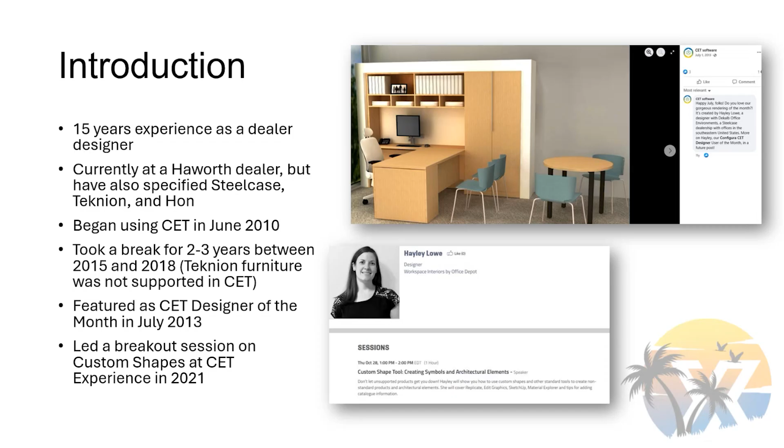All right, so you might be a CET grandma if I'm from Atlanta. Jeff Foxworthy is from Atlanta, so this makes me chuckle a little bit. You might be a redneck if guy.

So you might be a CET grandma or grandpa if you remember receiving the desk calendars in the mail, or if you remember a time before there was a CET experience. I remember the very first one. My coworker won tickets. We went to NeoCon and she entered a raffle at NeoCon and she won tickets to the very first CET experience, which was also here in Orlando.

You might be a CET grandma if you know what a key binding is. Tip: that is what they used to call keyboard shortcuts. So in my grandma brain, I still call it a key binding, and I confuse all my coworkers with that.

You might be a CET grandma or grandpa if you still use the P for your keyboard shortcut for position. I know a lot of people set this as M, but back when CET first came out, that was the automatic keyboard shortcut, it was P. So I still use P because old habits die really hard for me.

You might be a grandma if you try to use A as a keyboard shortcut in all your other programs. When I first learned that shortcut, it was for 'another.' A is for another. And here's what AI thinks I'll look like as a grandma. It's amusing to put that into my phone and see what it thinks I look like. My kids thought it was really funny when I showed them.

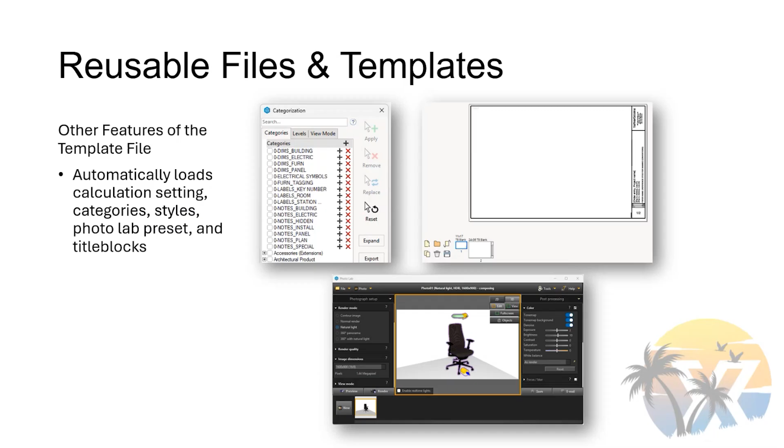Another thing you can do with a template is create a client-specific template. This is something I've only done for one client, and these are actual screenshots of what I've done for this client. When they have a busy season, they'll order 20 to 25 projects in about a 6-month period.

They cycle where they'll have 6 months where they're really busy, and then they've spent all their money and they don't order any more projects. They go into kind of like a shopping mall, strip mall type of location where they have 6 to 8 stations and a small huddle room, things like that.

Because of that, I can knock out these projects really quickly because I have all of the templates set up with all of their typicals set up in my template. In my template, I have an alternative that's pretty much blank with a title that says location name. And then I have an alternative that has basically what's on this screen, which is all of my typicals in it.

So all I have to do is they send me a test fit showing me what they want in there. I go into my alternative that has the typicals, and then I copy paste the items I need and arrange them in there.

I could get them knocked out with a drawing, a budget, because we use an Excel spreadsheet for the budgeting, and I had a template or starter file for that as well. I can knock out all that stuff in 45 minutes to an hour for each project.

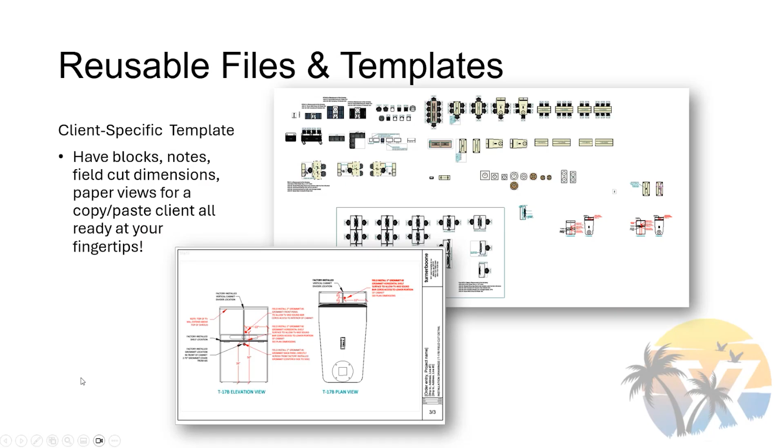Okay, so now we're going to talk about some photo lab tips. And this gets into me being a 1 on the Enneagram again. I like my photos to be lined up perfectly. I'll show you how that looks in real life here in a second.

There's a couple different ways you can do this. Say you want to do a 6-pack, because that's what my actual example here is, and you have 3 finish options you want to show the customer.

If you have that in 3 separate alternatives and in the same place, you can open up those alternatives and have the one common photo series for all drawing alternatives. You can render it, then switch to the next alternative and render it, and then switch to the next alternative and render it. And that works just fine.

But there's another way you can do it where it keeps it all in one alternative so that you can do render multiple, which saves a couple minutes. Both of them are fine ways to do it. There are certain situations where I do it the first way I talked about, with everything in a different alternative, and certain situations where I do it the second way I'm going to show you.

So what I like to do, I'll show you this in actual CET here for a second.

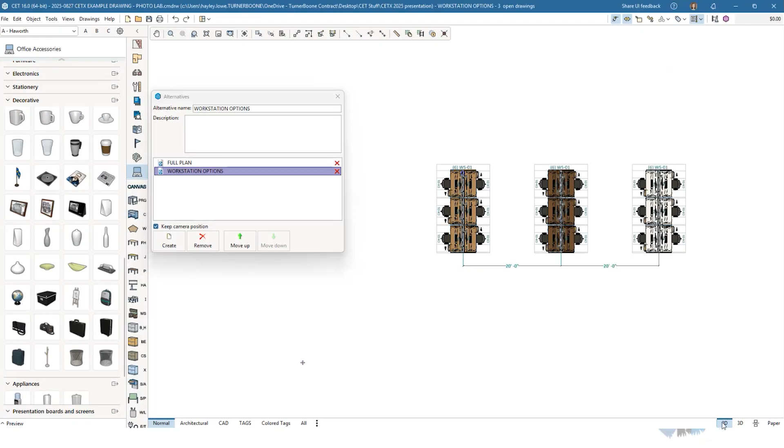So in this drawing, I have 2 alternatives. I have my full plan, and then I have my workstation options. In my workstation options, I have 3 versions of this workstation with the same exact components, just different finishes. I space them apart perfectly equally in my drawing view, so that in PhotoLab, you can take your 2D view clip box and your camera and move them by that distance. I'm going to show you in real life.

The photo lab. I do have separate unique photos for each alternative set up for this particular one, and I'm going to go back to this first rendering and just show you how I created that.

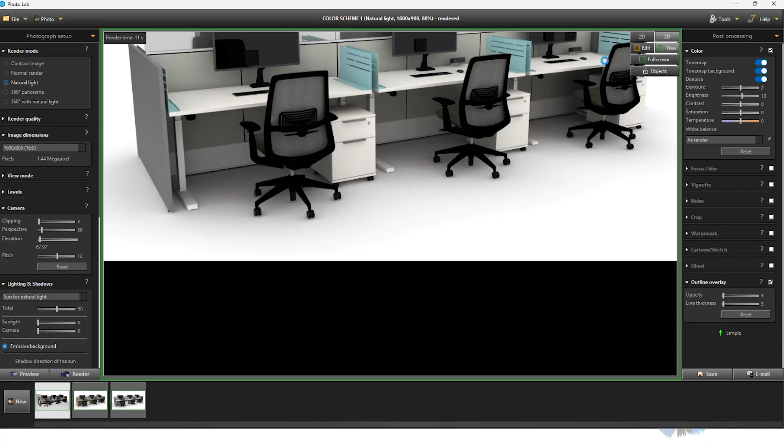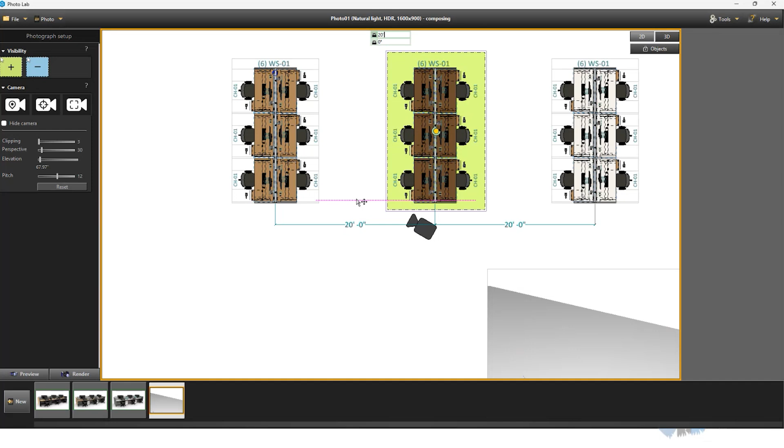So I'm going to go to 2D and click New Drawing. All I am going to do is, because I set this up... this CET is being glitchy today about selecting multiple things. Of course, on the day I'm recording, it does that. So I typically will select the 2D view clip box and the camera at the same time and move them, but I am moving this and hitting my arrow and then typing in 20 feet.

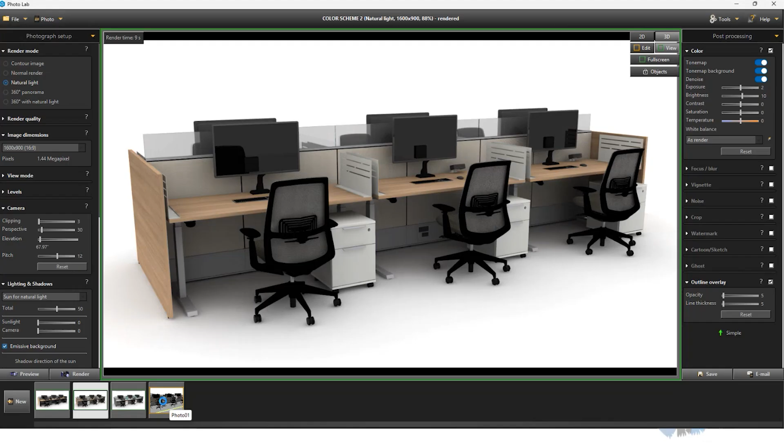And that is going to set me up with the exact same view on my rendering. So I had already done this, so I had all three. But you can see when I flip from here to here that it's the exact same view of those renderings.

So what I like about that is I could render all three of those at the same time and then save them. I almost always, when I'm rendering multiple things, will set it to render multiple and then work on typing an email, or set it to render multiple and go get my lunch. Or I have been known to set it to render multiple and then drive home while it renders on my laptop. Then I just get home, save all my renderings, and close my laptop down for the day. So just ways to save time so that you're not sitting there waiting on your renderings to be done is a favorite tip of mine.

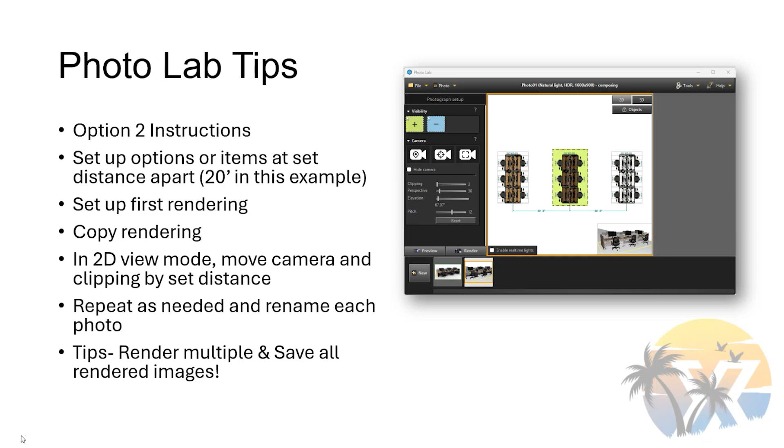So here's how these renderings look once they're done. I can kind of just go through the different finish schemes very quickly, kind of see what the differences are between them.

I like to do this too. Say I have two office options and maybe one has an overhead and one doesn't, or one has an extra lateral file and the other doesn't. I like to render them in the exact same view for that situation as well, just so that people can see, it's like in the kids' magazines that find the differences. So it's obvious what the differences are. When the angle is the exact same, to me, it helps people to see what the differences are.

All right, gonna take a sip of water. Been talking, but hopefully this is helpful information.

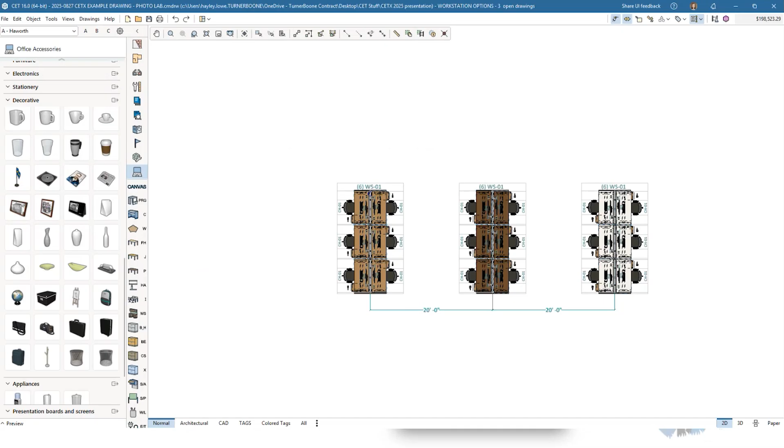Okay, this might be my top tip of the day. My favorite thing is blocks. I like to literally put every single item in a block. So I'm gonna pull up my CET again really quick and show you my block dialog in this particular drawing.

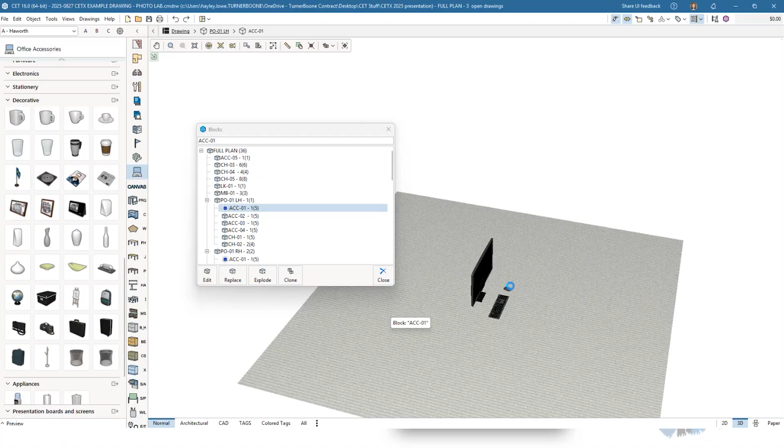Which that is keyboard shortcut B. So you can see everything is in a block, and then I have blocks within blocks. So if I click on this PO1, I have my accessory 1, 2, 3, like those are all blocks within the block. So my accessory 1 is my monitor arm, and that's the only thing in there, just the monitor arm.

So why do I do this? Because this is one of those things that does take a minute to set up beforehand. So where it pays off is when you start revising things.

So this is a screenshot of this same drawing. The other day I opened it and the power unit, the manufacturer had updated the catalog, but the symbol wasn't repopulating correctly, so I needed to replace it. Instead of having to go to 1, 2, 3 offices and 6 workstations and put it on the desk and fix it, it was in a block. So I literally had to replace it 1 time instead of 9 times. I did that in 1/9 of the time it would have taken me if I had to do it 9 times.

Another way that I like to use blocks is, say somebody has planned to use single monitor arms the whole time, and then somehow at the end of the day, their IT people say, hey, wait, we're ordering 2 monitors for everybody.

Or they say, oh, we actually have more money than we thought, where do we want to do dual monitors? I can go and switch that single monitor arm for a dual monitor arm, and it takes me 2 seconds. If I had 500 stations or 100 stations, even in cluster blocks, it would still take a lot longer than having just the monitor arm in the block. So I really recommend putting everything in a block and having blocks within blocks.

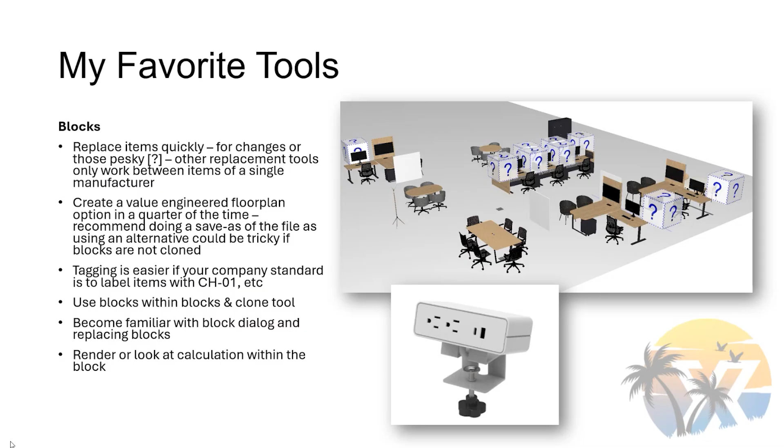Another thing with blocks, you've got to become familiar with this block dialog, where you can replace blocks, clone blocks, and do all kinds of stuff with blocks in that dialog. I like to render within my blocks sometimes, and look at the calculation within my blocks sometimes. There's actually a session spending an entire hour on blocks at this year's CET experience, so if you want to know more, I'm sure there's great information there. I would have totally chosen that topic too, but lots of people love blocks, so I definitely encourage you to check it out.

Okay, some other favorite tools that I have are replicate tools. This is something that I feel like my gap in CET kind of plays into, because these replicate tools, which they teach on in most trainings now, I think were released in the 2 or 3 years when I was not using CET and not going to those what's new in webinars.

In the tools toolbar, this circular replicate is really the only one I use because I find the other ones confusing since they're not what I learned originally. That's another thing where what works for me may not work for you. These two replicate tools might work perfectly for you. I prefer this replicate tool, which I have a keyboard shortcut for, Control R.

Because you type in more things and then hit apply, it's a little more thought out on the front end for me, instead of having everything in the green properties box like the other tool. But I love using these tools, and I use them fairly often. I like using that keyboard shortcut so I don't have to click on object and go find the replicate command, but I recommend using those to speed up your workflow.

I love keyboard shortcuts, and I have keyboard shortcuts set up for the align and distribute commands. If you wanted to align and distribute, you can go to object and align and do that.

You can also use this little pop-out toolbar, which I think you get to through tools. Let's see, I should have looked this up before. See, this isn't how I do it either. Tools, align and distribute, yep. So I'll show you that really quick right here. You go to tools and align and distribute, and it pops up this little pop-up.

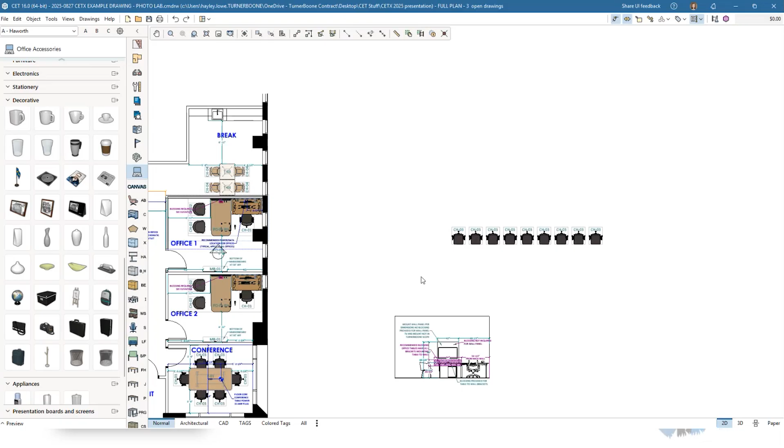But I've done this for many years using keyboard shortcuts, so I'll show you a little of what I mean. If I have a chair and a bunch of them, I have keyboard shortcuts to align them all down by hitting D, and distribute them all horizontal by hitting H. So if I didn't want to use that align and distribute toolbar, which I just pulled up with my keyboard shortcut, I could do it like this.

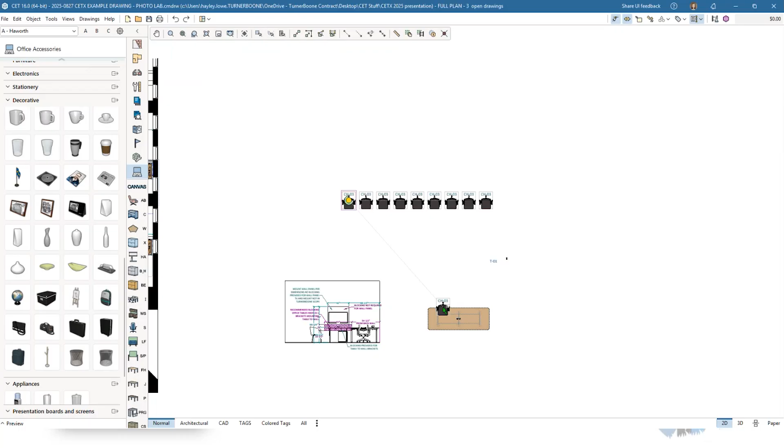This is usually how I arrange chairs around a conference table. I'm going to explode this block. Let's say I have a longer conference table here, and I need to put my chairs around it. Oops, did not delete that. So I'll come through here, put my chairs around the table, align them up, and distribute them horizontally.

Then I'll copy them using the A command, and align them using my position command. Oops, no, we're supposed to all be selected there. So I'm using position, then I hit the right arrow so it goes to the right, and I'm going to toggle it up.

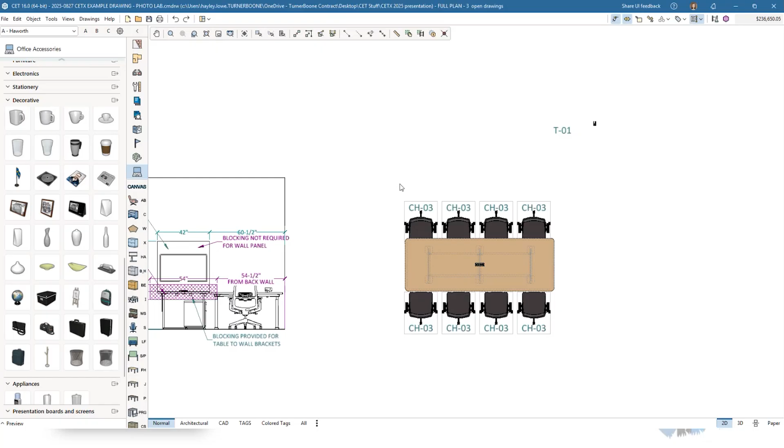Now I've got my table and my chairs, and this is where CET is being a little finicky today. So what I want to do is grab this - there we go. It's been weird about selecting things when you hit Control down today, so hopefully when I present live it won't do that. But if I hit H, it will align that table in between those two chairs, and if I hit V, it'll align them vertically so my table and chairs are perfectly aligned.

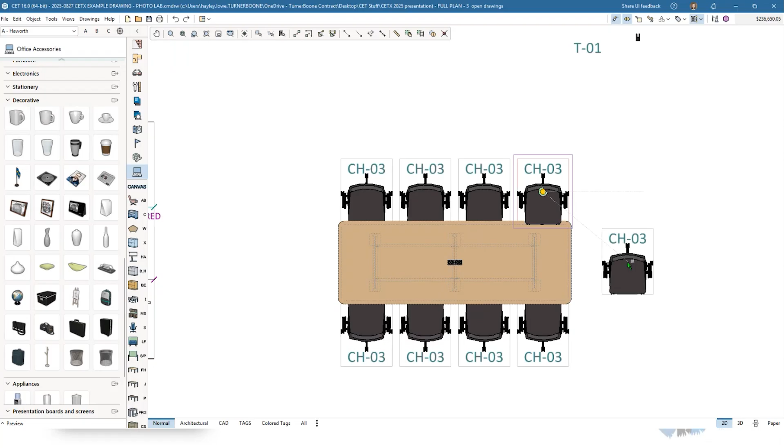This again goes into me being a 1 on the Enneagram and really liking things aligned perfectly. I'll even do that with my end chair, aligning it vertically between those two chairs. I could have also just positioned it from the middle of my block to the middle of the table - both approaches work.

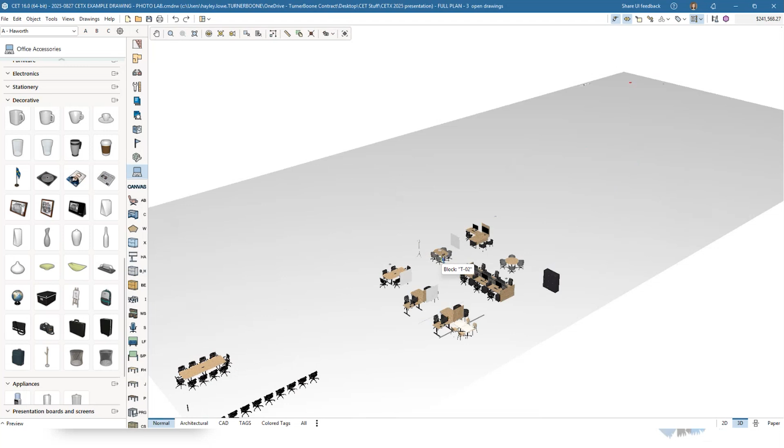If I go on somebody else's computer, like if someone asks for help or I borrow a loaner computer if mine's broken, I just go set these up, because otherwise I'll be sitting there hitting these buttons so many times a day. This is one of those things I was talking about with building habits - it depends on how many times a day you do it. I use these 3-4 times an hour, not just 3-4 times a day.

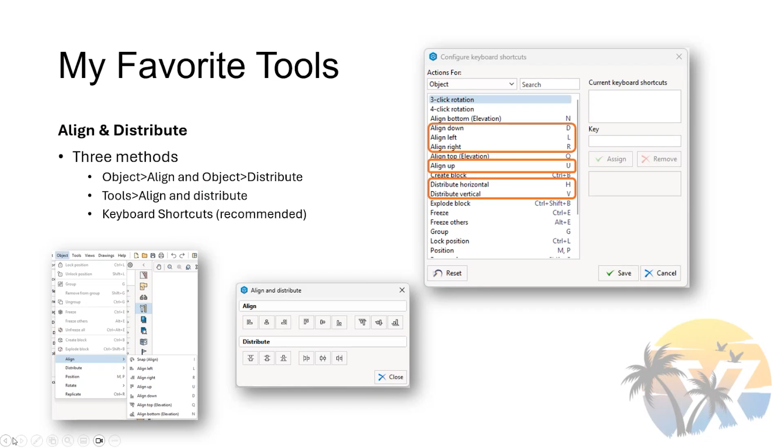This is an example of something I learned on a webinar that wasn't even part of the topic. It was a HON webinar with Harmony—I don't know if she's still at HON, since I don't use HON much anymore. I used it a lot at my previous dealer; they did monthly webinars. I learned that you can change the elevation of things using the page up and page down buttons, and get them back to zero elevation by hitting the home key.

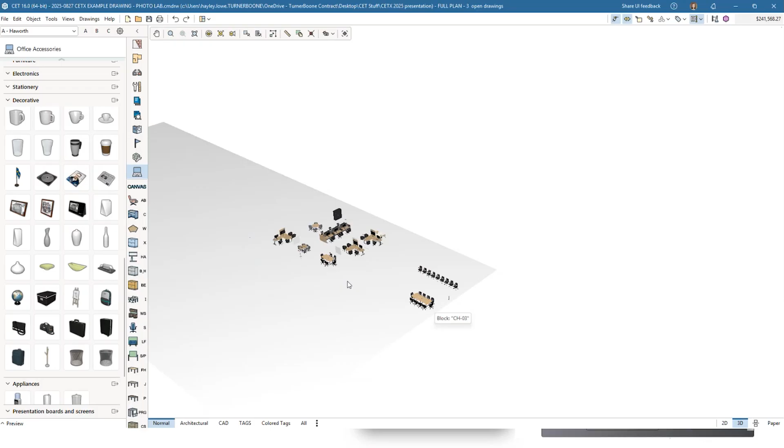I've highlighted where those keys are on your keyboard, and I put some accessories in this drawing so you can see. Say this purse was supposed to be on the floor, but when I brought in the accessory it automatically snapped to sit on top of my table. If I hit home, it'll go down to the floor. This tablet guy accessory is fine, so I don't need to adjust his elevation. But this telecom furniture piece came in at the wrong elevation.

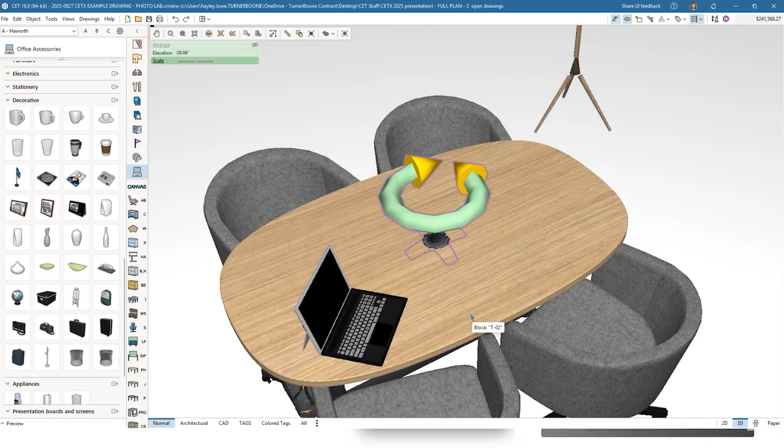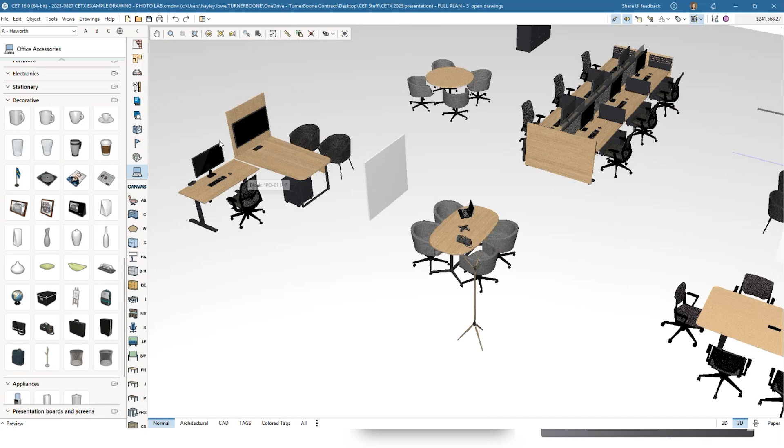If I hit page up on my keyboard, it will page that up, and control plus page up or down will move it in smaller increments. So that's page up, page down, and control makes it move in smaller bumps. If I want to get it just perfectly on top of there, I can. That's how you can easily and quickly change the elevation. I use that on the monitors a lot, and when things come in at a weird elevation, like they do sometimes, you can fix it that way.

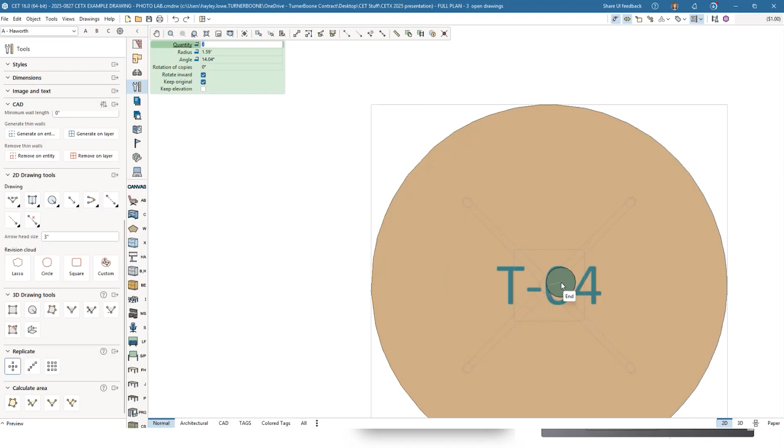I know there's another quick tip using that circular replicate tool. Let's come in here... if I have keep elevation checked on here—

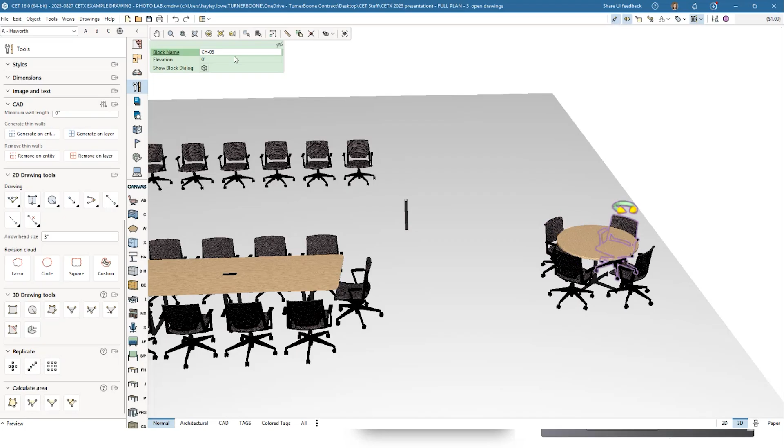it used to make things float in the air, but it's not doing that anymore. It used to be that if you used that tool, all your chairs would end up floating in the air while your table stayed where it was supposed to be, and I'd have to click on each one and hit home, home, home, home to bring them all back down. Instead of clicking on each one and changing the elevation individually, it's just one button, one keyboard shortcut, to speed that up.

There are also align top and bottom elevation options. So if you have overheads or tech boards floating on a wall that you need to align, there are tools in there for that.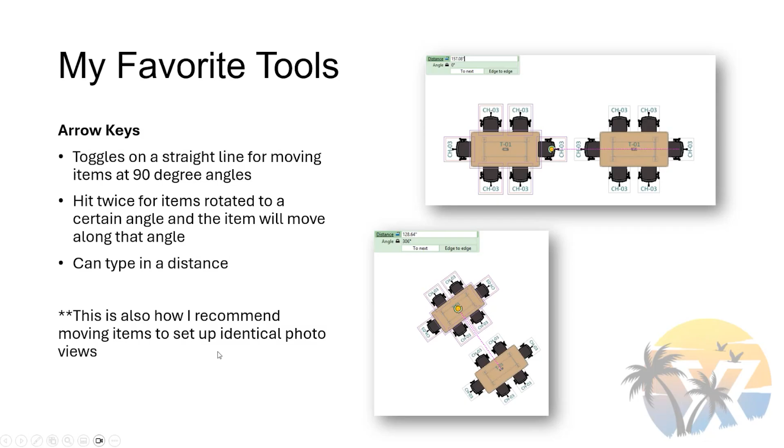If I hit the right arrow key once, it moves directly to the right. But if I hit the right arrow key twice, it picks up on that angle—these things are already rotated too. I used that when I set up those identical photo views of the workstations we looked at earlier.

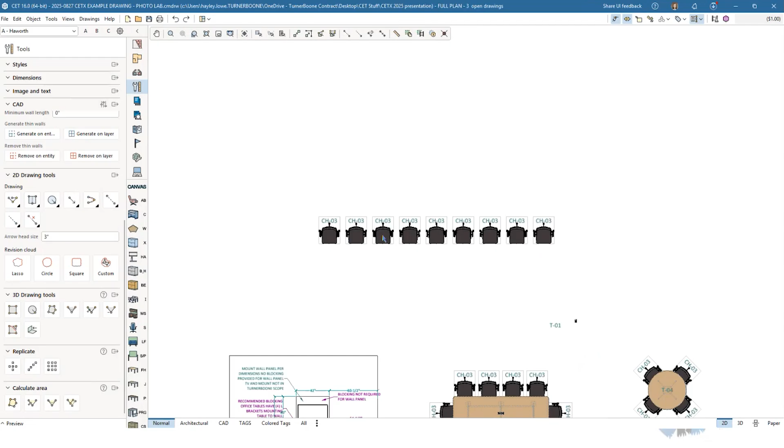Help lines—I use help lines all the time. You saw that a minute ago when I was putting the chairs around the table. I love help lines and made myself a keyboard shortcut for them. The shortcut is J, which may not make sense, but it's close to L and close to H, so those relate to help line. I already used H for distribute horizontal, so let me show you what my H does again.

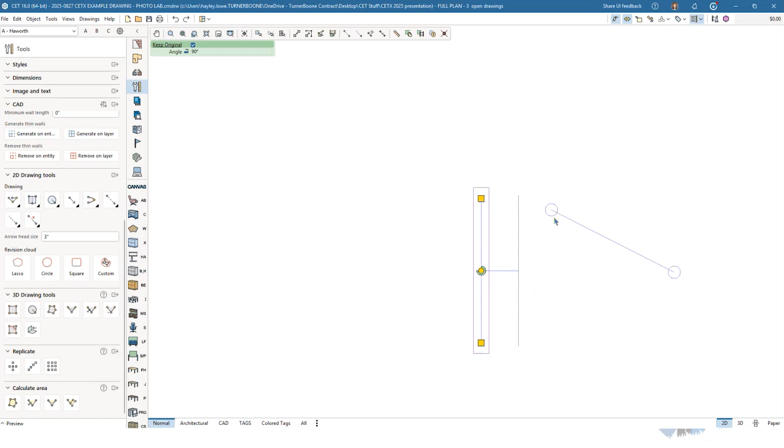My H will make those evenly spaced out, so I couldn't use H for help line—I use J instead. I'll show you quickly how I drew that help line. I just took that line and did Shift M, which is the keyboard shortcut I set up for mirror, and then copied it.

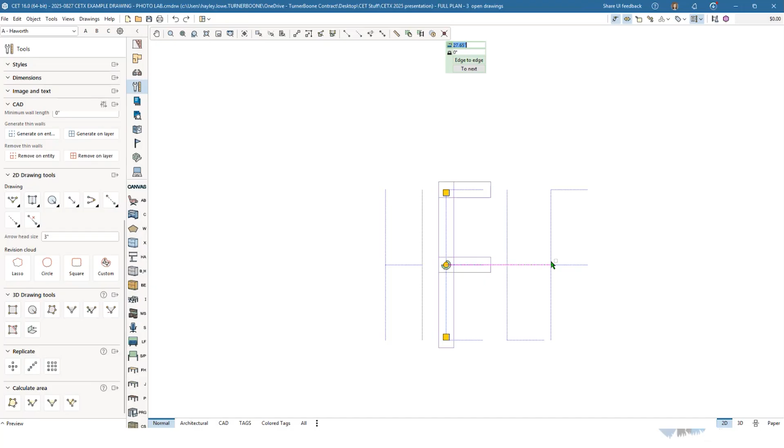And I copied these lines, using my D to align down and my U to line up. Then I copied the lines I needed for the L, and copied the lines I needed for the P. Used my J again, and there I have my help written using help lines and my other tricks. So the more you use a tool, the more you're going to find other ways to use it and things to help you.

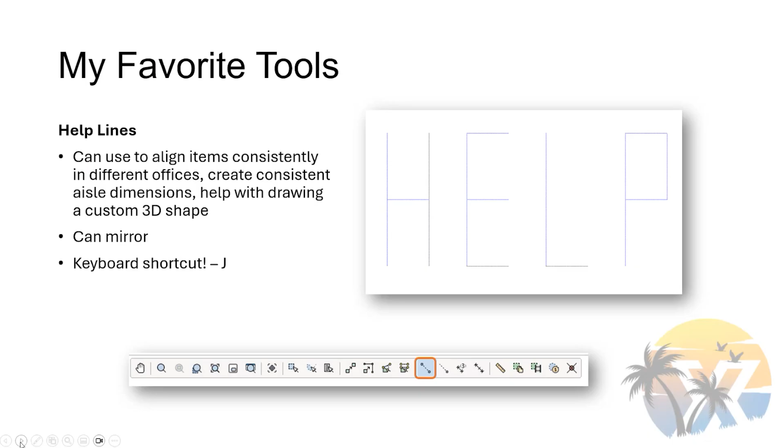So help lines and mirroring, I really love to help things be lined up perfectly because I like things to be lined up perfectly. And it keeps me able to line things up perfectly without spending too much time on it.

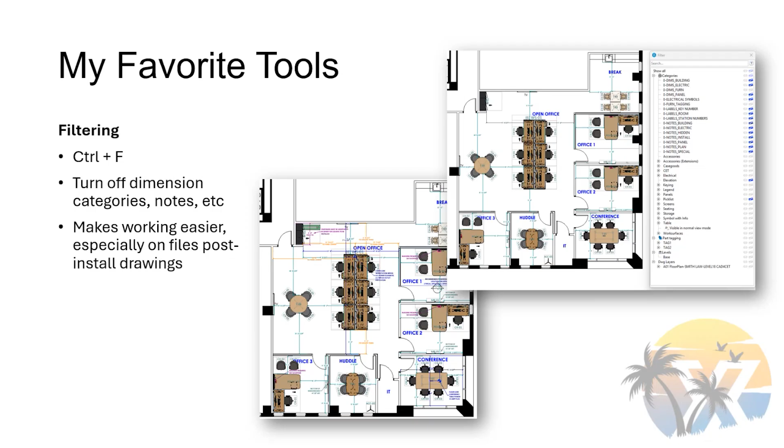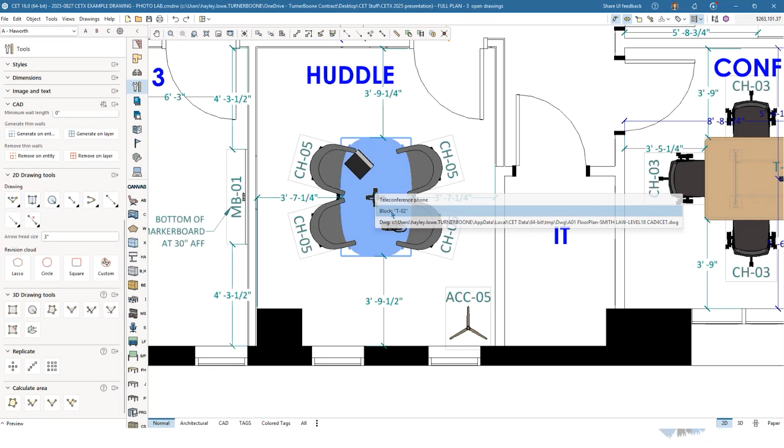This is another thing I think I learned on a HON webinar back in the day. But if you are trying to select something and having a hard time getting it to select properly, if you hit Control and right click, it will bring up a dialog box. So I'll show you right here — it says, do you want to pick up the phone, the block, or the DWG file. If I go a little bit to the side, actually if you zoom out more, it'll be close to more things, so I'm like, okay, yes, I want to edit this block.

So if you are trying to select a dimension and for the life of you it will not select — I feel like that's what I get into a lot, trying to grab a dimension so I can adjust it, and for the life of me sometimes it's like, why won't you select my dimension? Or I'm trying to select the table and it just wants to select the chair every time. Hitting that Control and right click will help you select, then you can pick what you want to select from that drop-down menu.

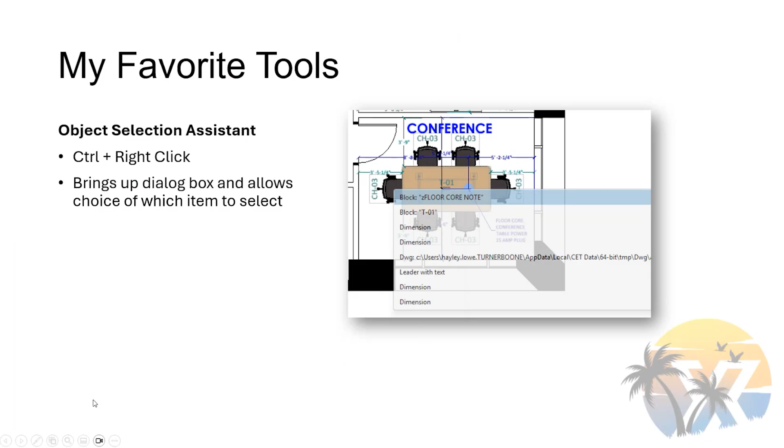Hiding things in print. This is another thing I kind of stumbled on accidentally — I don't remember ever learning it in a training — but if you have things you never want to show in print, you can right click them and hide them in print. This doesn't work for things like a chair per se, and usually doesn't work for smart symbols. It usually only works for things like text, things like pick lists. I pretty much never want my customer to see a pick list, that's confusing to them in my opinion, so I almost always right click and hide it in print.

I was working on one of those projects earlier today where I had a full drawing for the main option and then a full drawing for a VE option. On the VE option, I put in big red text across it saying this is the VE option, and then I hid it. That way, when I was flipping back and forth between the drawings, I didn't have to look at the top toolbar to say, okay, am I editing the right drawing? This is an edit I need to make in this drawing, not the other one.

Another thing I'll do, bringing my CET back up here again — I have those accessories in that conference room now, and those are things I never want to show up in print, since this is like my electrical drawing. I don't need those in my electrical drawing. But in order to go back and turn off accessories, I'd have to go into every single paper view I already have set up and turn those off. But if I grab those, right click and hide them in print, then I can go back and it's hidden in this print view, hidden in that print view.

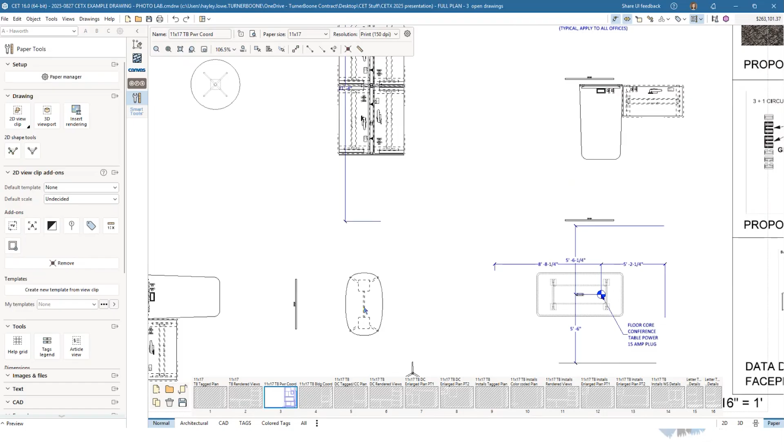But every single view, those items are now hidden. I might have accidentally grabbed my AutoCAD plan.

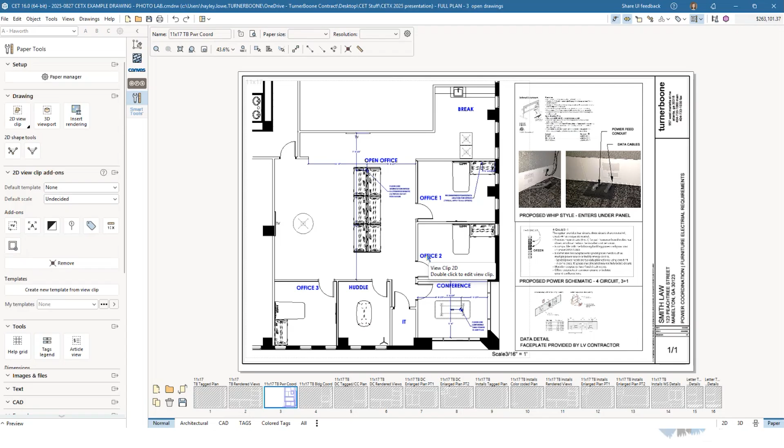Right click, show in print. I did not do that on purpose, but that's the other thing I was actually going to say, even though I did not do that on purpose, is if for the life of you, you cannot figure out why something will not show up in your paper view, go and check and make sure you didn't accidentally click hide in print on that thing. I've had that happen before. I've had coworkers come to me and be like, I cannot get this thing to show up in print. I've done everything. And this was what was behind that issue.

All right, I am running out of time, so I'm going to try to go through this quickly. But there are still things that seed drawings are useful for in CET, even now that we have template files.

So I have two that I'm going to share. I'm sure there are other things that I can't think of right now, but I use this stop motion video seed file. This is one of those things I do 3 or 4 times a year. It's not something I do on every project, but now that I have it set up, it just takes me a couple, maybe half an hour to an hour to do this anytime I need to.

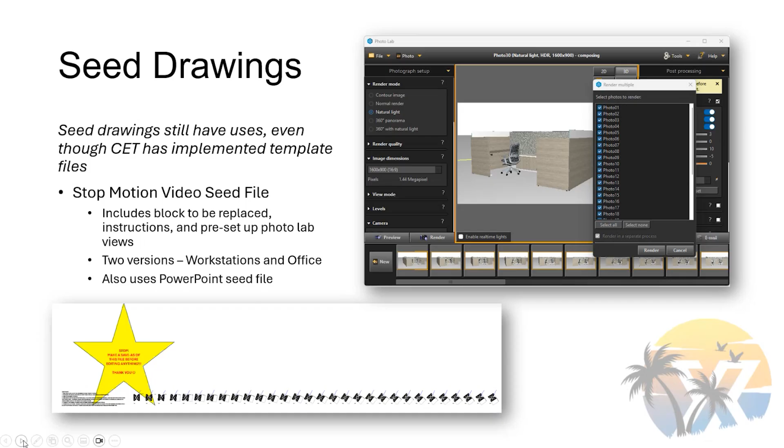So basically what this does is it is a seed file where I have the same cluster of workstations in a block, and then I rotated the block, I think 2 degrees every time, and then moved it 20 or 25 feet every time. And then I set up all my photo views so that the camera angle is exactly the same, and moved that camera angle 20 feet, 25 feet, whatever it was, so that I can then go in and render multiple. And basically then I have a PowerPoint file that you can export as a video, and it will rotate your drawing around.

So this is a fake client. I'm sure there's somebody called Smith Law, but I didn't actually do any furniture for them. But this is what it looks like when you do it.

So CET took away the movie studio functionality because everybody was just going to Twinmotion or sending it to a contractor. It wasn't very popular, but we still had the need to kind of make this sort of thing quickly. So I kind of got inspiration from a design pop video and learned how to do this.

The next thing I think this is going to show you, I hope I kept this in my example. I also will do 2 renderings and have them fade out. So those other ones are 20 to 30 renderings to create the moving thing, but you only need two renderings to create it fading from one finished scheme to another scheme. You only need a rendering of one scheme and a rendering of the other scheme, and you just change the transparency in PowerPoint before you export it.

So that's something that I use a seed file for. And feel free to go back and watch this video again since this is a recording.

Okay, then the other thing I use a seed drawing for is I have an item image seed drawing. So we do basically a rendering of each chair by itself to go on our spec pages that we show the customer. And we put that into a budget format for the customer because customers are visual. They don't understand what that chair looks like unless you show them a picture of it. And they don't remember the name of the chair from their showroom visit. They need to see the picture. And then they say, yeah, that's the chair I wanted.

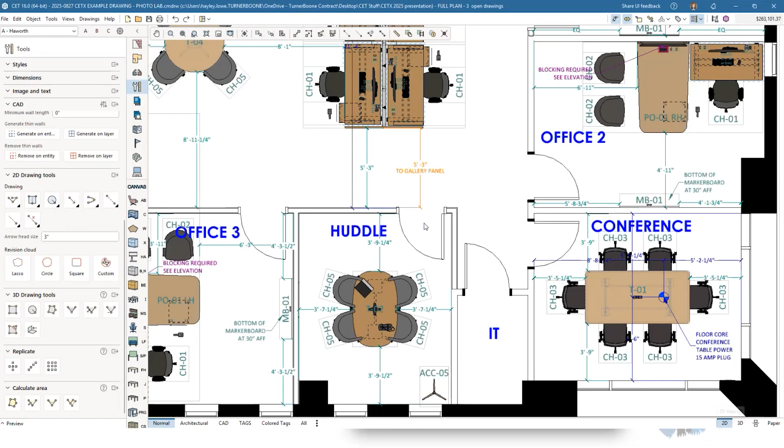So I'm going to show you really quick how I would actually use that. So if I needed to make item images of all of these things, sometimes what I like to do is I will go into the actual block and render it in the block. So that's what I did in this. This is a pretend project I did for our design standards. So I will go in the block and render it in the block.

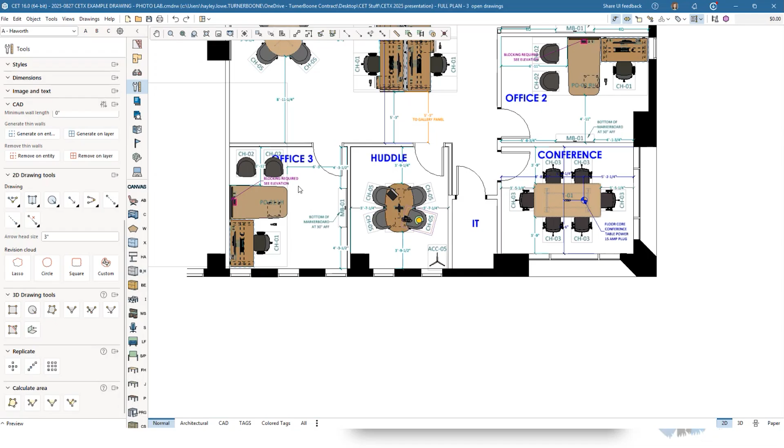That means I have to go in the block, change the floor color, open up PhotoLab, set up my photo every single time. So if I want to set it up in this seed file, I can go to this item image template, and I just brought in all of my furniture, and I have chair blocks set up in here. So I can go to B in my block dialog, and I can say, okay, chair 1.

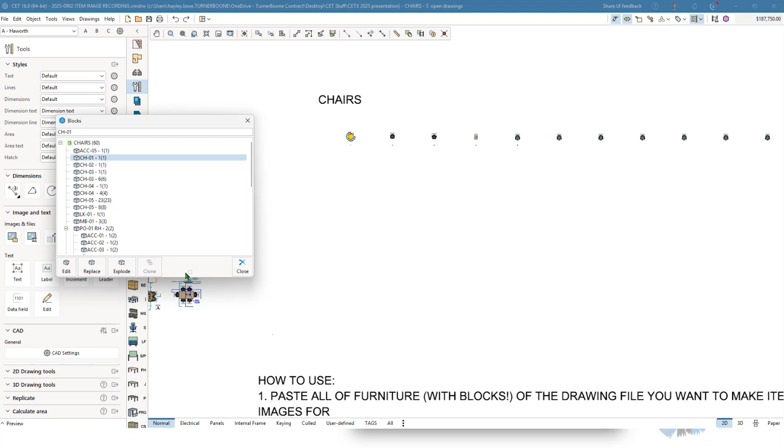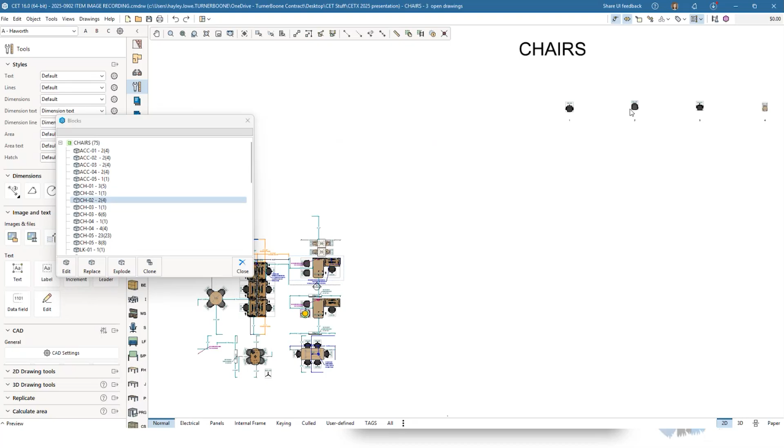I'm going to replace this block, chair 1. My chair 2 from this drawing is this chair. I can replace that one, chair 2. I can replace chair 3. I had already set this up, but you get the picture.

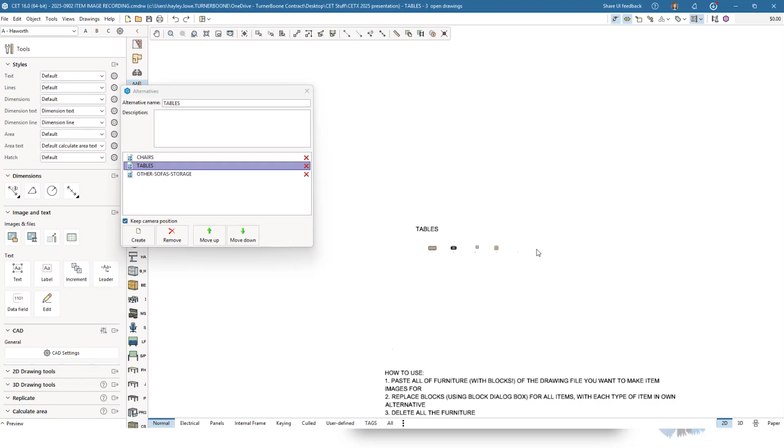So I just replace all my blocks here, and I have 25 of them set up. I probably won't use them. And then I have an alternative set up for my tables, so then I can go replace these tables. And then I have one set up for storage and other things, so that when I need to do my renderings, I already have those all set up. They're named CH-01, CH-02, CH-03.

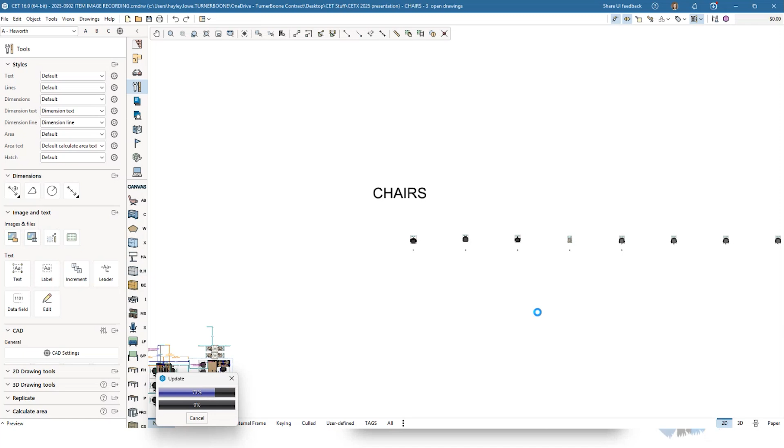I might have to tweak them a little bit, but I don't have to go and set every single one up. Now this is taking a second for PhotoLab to open because I have 25 renderings set up in there. Instead of going into each block and hitting render, I can do my render multiple, go to my tools, render multiple, and just select the 5 I need to do. I also have my post-processing settings already set up on all of these renderings, so if I'm in a hurry, on some projects this is a time saver, and on some it's not. And I will use that.

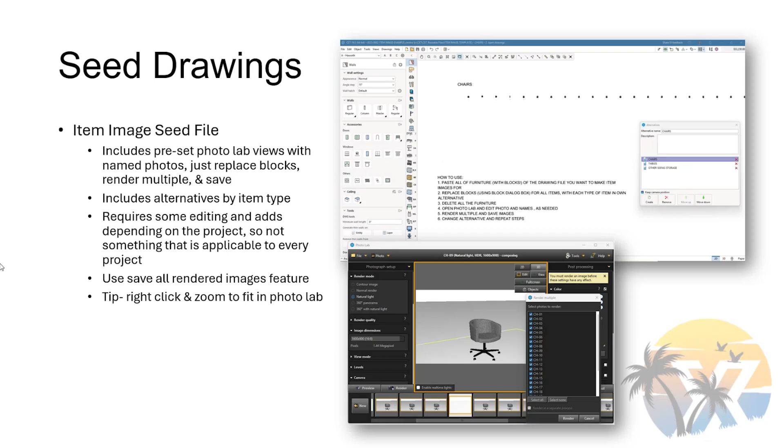So what are some things you can do to implement some of these things? Write down 1 to 3 things that you want to continue, cut, and cultivate. This is not my idea - I got this from a consultant firm that's been doing some leadership type lunch and learns with my company. Continue is something that's working really well for you that you want to continue. So maybe you're in a really good habit of exercising, or you're really good about following your company standards. Write down those things and keep doing them.

Then write down 1 to 3 things that you want to cut. Years ago, I got into a bad habit - there was a Wendy's on my way home, and maybe once or twice a week, every now and then, I would just grab a small fry from Wendy's on my way home. That would be an example of something to cut. I don't work near a Wendy's anymore, but I've cut that out.

Or the actual example I did when this consultant firm worked with us, as far as something I cut, was working unnecessary overtime. What I mean is, I mostly work from home, and I would think, oh, if I just do 10 more minutes I'll finish this thing and check it off my to-do list. Well, that was turning into 30 to 40 minutes - it always took me longer than I thought it was going to take. So I decided, when it's time for me to be done, I'm going to be done, unless I'm working on our RFP or a big deadline. I'm going to stop trying to cross that one last thing off, and just come back to it the next morning. That has been a good thing for me to do.